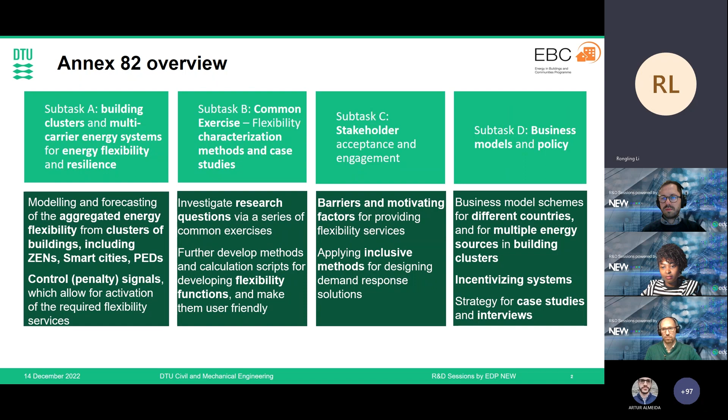Annex 82 started the working phase in 2021, and now we are in the middle of the 3-year working phase, and we are right on track. We have finished the first common exercise. Now we have defined the second one, and teams are starting to work on it. Through this common exercise, we define methodology. We also started to look into case studies and design surveys and interviews, and I will give you some details on this. It's a rather big team. We have participants from 22 countries, with about 50 very active participants working on these 4 subtasks.

Some highlights. We recently published a 10 questions paper regarding energy flexibility in buildings. Andy from Lawrence Berkeley Lab and I were leading this task. This one also served as a white paper for us to look into those questions when we work on specific tasks. We have many ongoing activities planned for publication. For example, there's another review on energy flexibility in clusters of buildings led by Jerome and Rui, and this paper is in the revision phase. We have another one on energy resilience of the built environment. That work has also started; we are now doing a literature review.

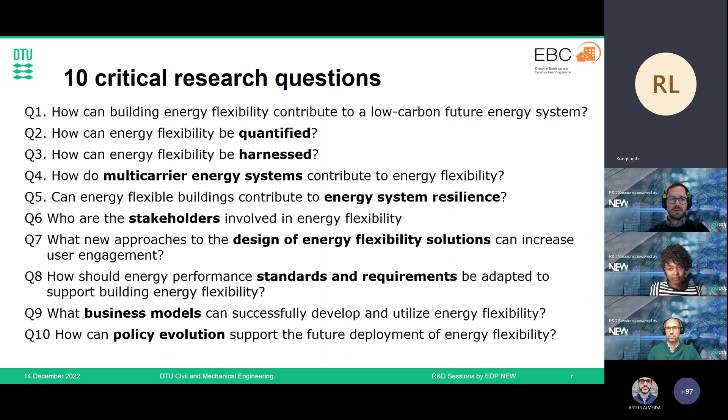At the moment there are no building standards that support the use of energy flexibility in buildings. We discussed that, and we suggest this should be changed. Then the last two are about business models and policy. In the end, we provide 8 recommendations on how to provide solutions to these research questions.

For example, the first one is using data-driven methods and focusing on aggregated level, considering the requirements from different stakeholders. In terms of control, we recommend using a supervisory control that can respond to grid signals at the building and grid level.

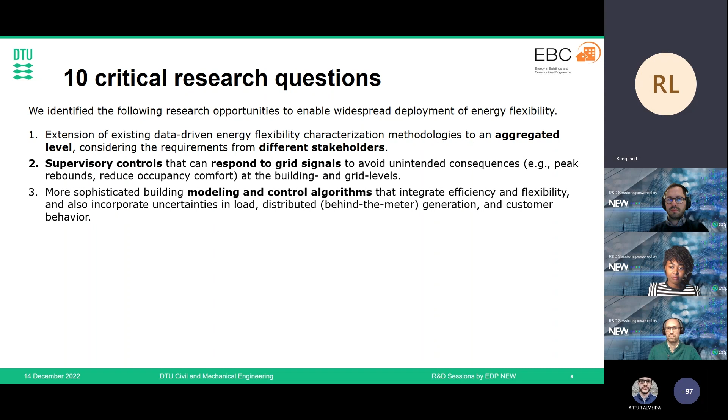And regarding algorithms, we discussed that more sophisticated building models and control algorithms are needed, that also take into consideration both energy efficiency and flexibility.

The fourth one is very clear that it is a research problem. We need to engage multidisciplinary approaches to address the technical, economic, and societal complexity of the challenge.

Then the fifth one is regarding resilience: design flexible building systems and controls that may contribute to more resilient systems when it is needed. We think that in order to increase the resilience of a system, the design phase is very important.

To include certain elements. And regarding policy and regulatory framework, we think that existing ones are not supportive enough, and we need to create new energy performance standards that do not penalize flexibility.

And the seventh, regarding business models, we think that scaling up is a very good solution for lowering the cost of deploying energy flexibility. Business models can be developed that support scaling up energy flexibility across multiple buildings and technologies.

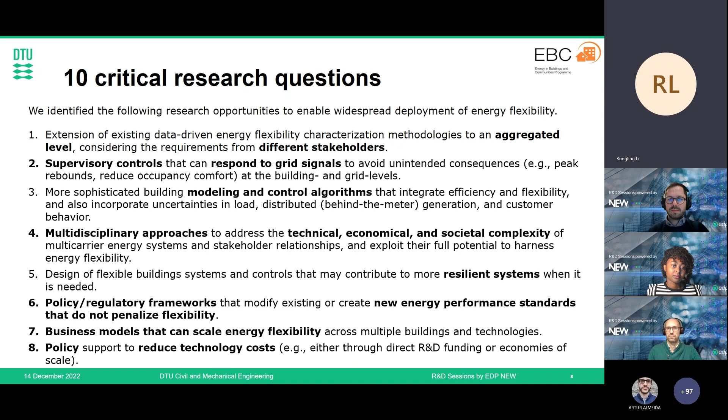Okay, and yes, as I said, we're in the middle of the 3-year working phase. However, due to the pandemic, we had only one in-person meeting in October, and that was a very good one. We had a very good discussion, and after that we had very good progress. This is a group photo you can see, and this is us. Thank you.

Thanks, Rongling, for this great overview about the energy flexibility topic and for clearly giving us the questions that should be addressed in the future in order to make use of energy flexibility.

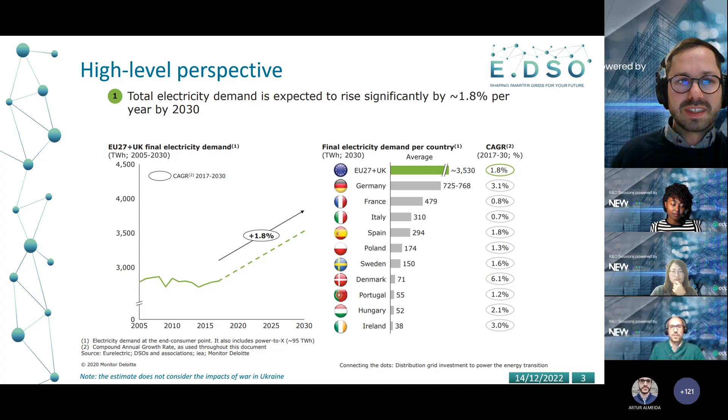This rising electricity demand has some drivers presented here. We can say there will be significant addition of heat pumps in the residential sector. Another driver is electrification of transport, so significant addition of electric vehicles, and of course renewable energy resources. 70% of the renewable capacity added is probably to be connected to distribution networks. And 40 gigawatts of the renewable energy capacity will actually be self-consumption, connected directly to homes and buildings. So these are the main drivers for the electrification trend.

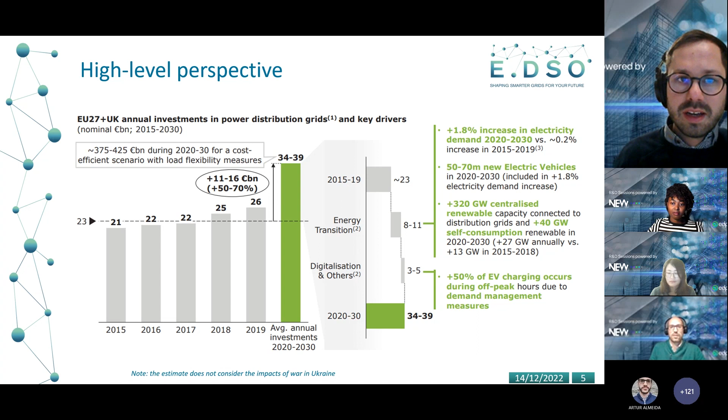If we break down the drivers of these increased investments, you can see that electrification of buildings, electromobility, and so on actually take up quite a significant chunk of the investment needed. But also, just to clarify, modernization of grid equipment, digitalization, smart meters, which are loosely connected to building smartification and electrification of appliances in buildings, also take up quite a lot of the investment needed.

So what is the actual potential of building smartification for DSOs in trying to address this significant increase of electrification and decentralization of the energy system? The potential is mainly related to networks at the low and medium voltage level. In the shorter term, we see the potential mainly in increasing grid observability for the network operator, which can help manage low and medium voltage networks, where grid observability today is not as developed as on higher voltage levels.

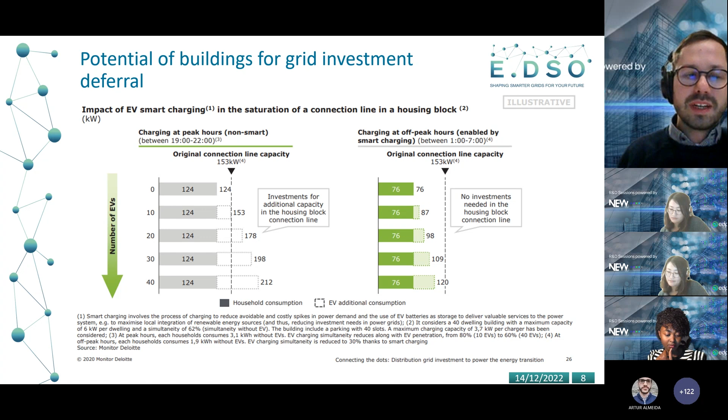To enable this, we obviously need to develop a new ecosystem for the medium and low voltage grids, especially with connecting all the elements we just described - the network operator, all the devices in smart buildings, and also developing the digital infrastructure necessary to achieve this.

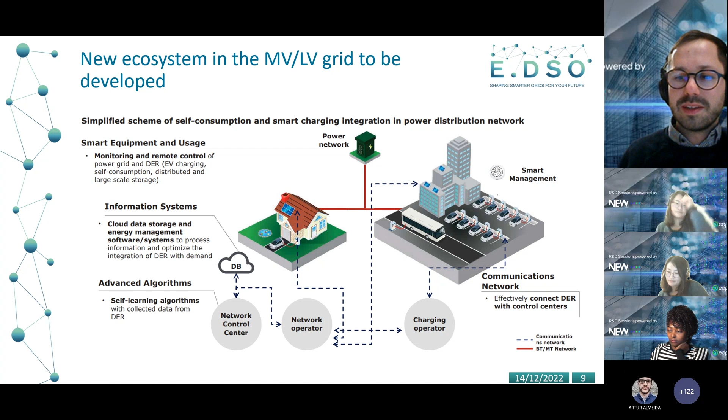Some of the specific challenges that DSOs are facing right now when trying to develop this ecosystem are described in this slide. First, finding business models and engagement of active prosumers. This relates to the point that these smart building applications are quite new, and consumers aren't familiar with the options available. The prospect of participation in flexibility markets might not be attractive for consumers as they don't know what it means. It's not clear to consumers, in our experience, that this can mean driving down the costs of energy. So this is something that needs to be worked on - consumer engagement.

It's also about investment certainty, as all these smart appliances in homes and buildings involve quite big upfront costs to invest in. But with flexibility markets being a market environment, revenues aren't so guaranteed. So we need to strike a balance between investment certainty for participants and having liquid markets that could also bring the required benefits for DSOs for local congestion management, for example.

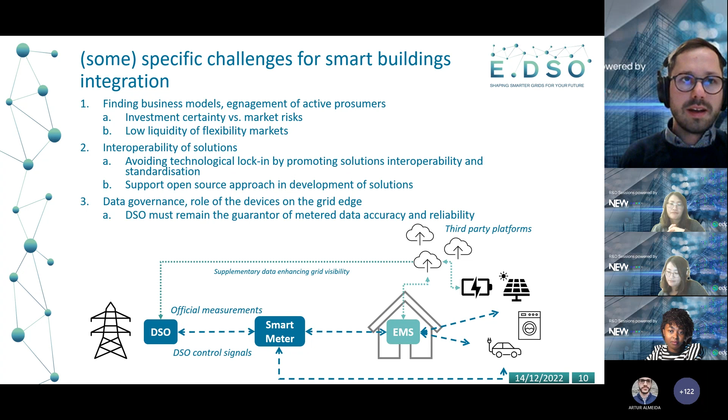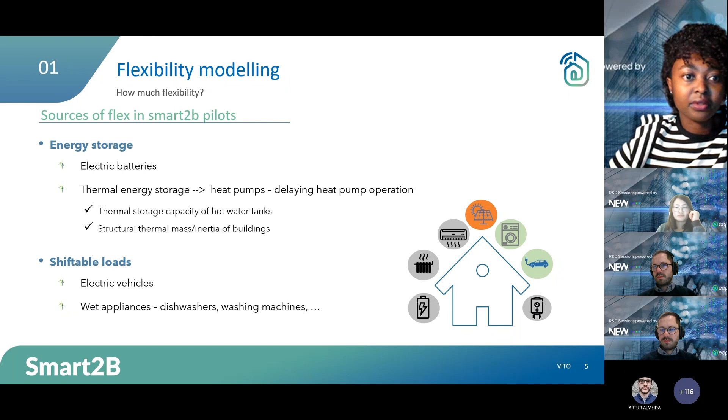But then the question that comes to mind now is how much flexibility can we get from all these devices that are found in buildings? So we need to somehow find a way to quantify this flexibility such that it can be used for something. And to quantify this flexibility, we are using this concept of flex graphs. So a flexible device has several options in time that it can consume or produce energy. So this leads us to having an energy consumption or an energy production plane.

So what a flex graph does is to visualize the area between the highest and the lowest path of this energy consumption plane, where the area of this graph then tells us how much energy can be shifted, and the number of possible paths within this area tells us the potential to shift the energy consumption or the production.

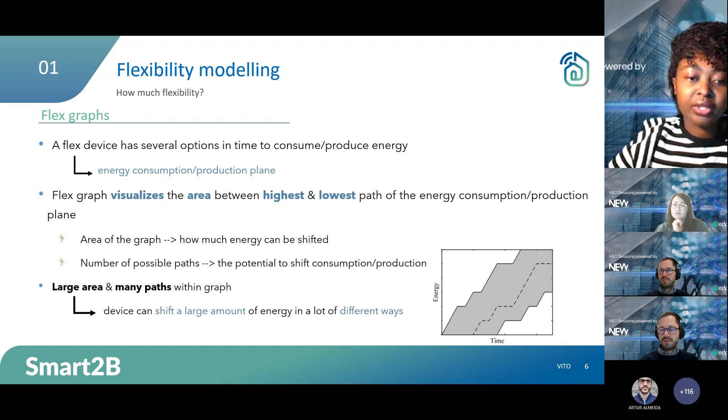So depending on how large the area is, on the number of paths that we can find within this energy consumption plane, then we can have an idea on the exact amount of energy that we can shift and the number of different ways that the device can consume this energy.

So looking at the flexibility that we can get from the devices that we are looking at in the Smart2B project, if we take, for example, an electric vehicle, there are two main things to take into account when we look at how much flexibility they can offer.

So we look at, okay, when the owner of the electric vehicle plugs the car onto the charging pole, if we charge the car as soon as possible, or if we delay the charging as much as possible, but while making sure that by the end of the day, when the user has to leave, the energy that was requested on arrival is met.

So then we can have an energy consumption plane, as the one shown here on the slide, which we can then use to quantify how much flexibility we can get from this electric vehicle.

If we look at a hot water tank, then to generate the flex graph here, we look at the different ways of either keeping the water in the buffer at the minimum temperature, such that if the water leaves the tank, the users do not perceive the water as too cold, or keeping the water in the buffer at the maximum temperature, such that the users don't perceive it as too hot.

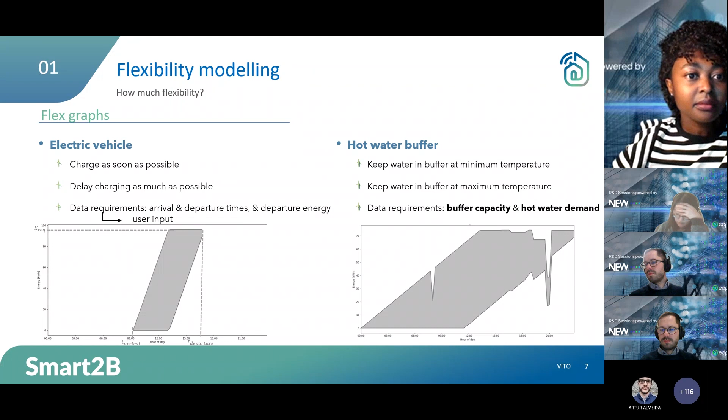Then we also have flexibility that can come from the thermal inertia of the building itself. And typically the flexibility from these buildings is represented by the temperature boundaries specified by the users of this building. But the challenge here is that if we want to use this flexibility from the thermal inertia of the building with the flexibility from the other devices, then we need to map this from the temperature plane into an energy consumption plane.

And to do this, we need to model and characterize the building behavior such that we can then determine the additional amount of heat that the building can store, and therefore the corresponding reductions in energy for heating or cooling these buildings.

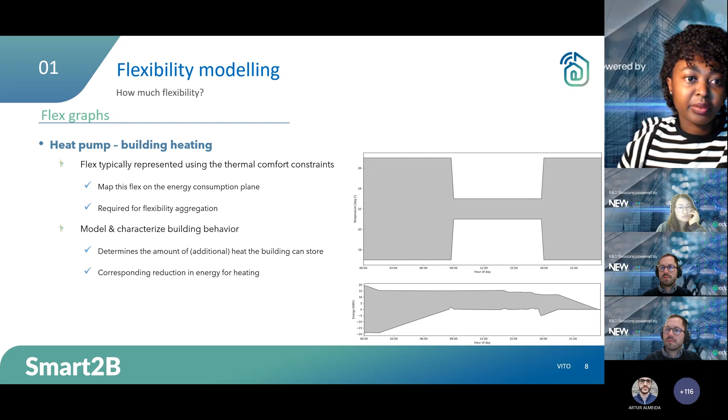So in the Smart2B project, to model these buildings, which we need to generate the flex graphs for the building, we use gray box models of buildings. A gray box model is a very simplified way of representing the building, where we lump and represent the different building components as thermal resistances and capacitances.

So here we exploit the physical knowledge of the building to define a model structure and some state equations of the building. And together with some weather and building measurement data, we can determine the parameters that are much more representative of the building that we are considering.

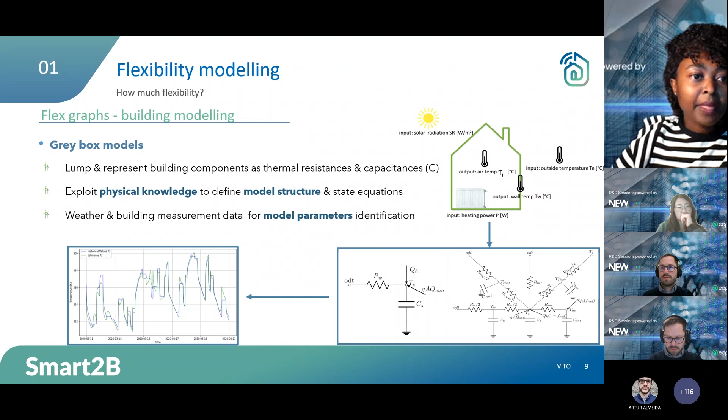So this notion of flex graphs is a very simplified and generic way to quantify and represent flexibility from different devices and installations. And it's also very good because it's very easy to aggregate flexibility from different devices, different buildings into a single resource, which could be used either for energy cost savings or for local congestion management, as Andrej mentioned in his presentation.

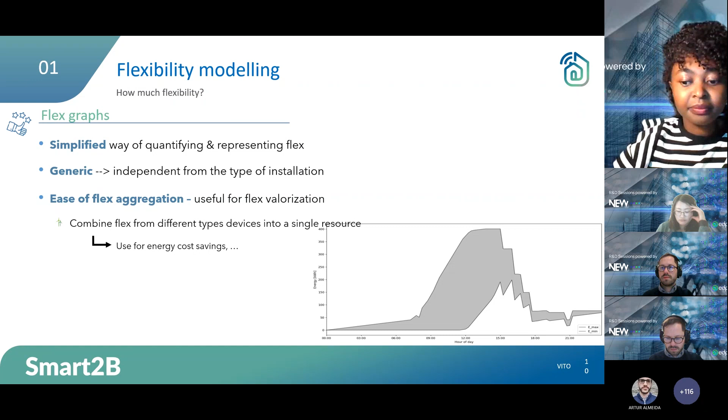So to valorize this flexibility, because of course it's of no use if we can quantify this flexibility but cannot use it anywhere, it's typically done through demand response applications. And there are two types of demand response: the explicit and the implicit demand response.

In the explicit one, the devices that are providing flexibility can be directly remotely controlled, typically by an aggregator or a system operator. And this is typically done with large manufacturing industries.

Then we have the implicit demand response, where there is indirect load control through a time-varying energy price signal. And this is very common at the building and residential level through the use of energy management systems and controllers, which is what we also consider in the Smart2B project.

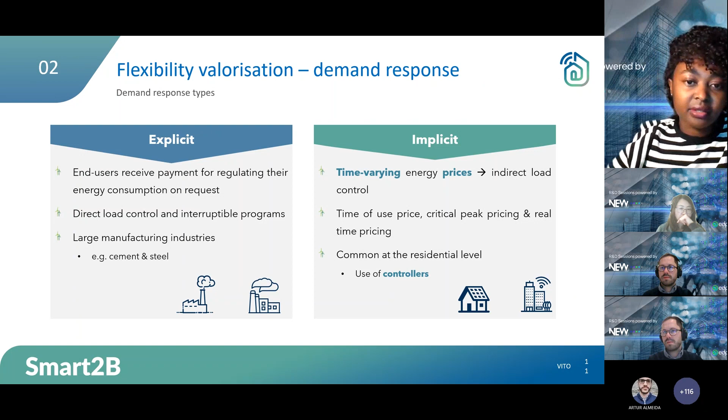So to have an economic value of the flexibility that we model and quantify in Smart2B, we actually use this by scheduling the operation of the different devices that are providing this flexibility. So we do this via optimization, where we consider not only optimizing for least energy cost, but also looking at the least energy consumption. So we have a kind of approach where we first have an optimization for least energy consumption, specifically for the HVAC systems in the building.

And this provides us with a baseline schedule, which is then used in the flexibility modeling to get the flex graphs and quantify the flexibility of the buildings. And this aggregate flex graph and the baselines are then used in the least cost optimization to obtain an optimal power schedule that is then disaggregated to the different devices in the building as the control signal here.

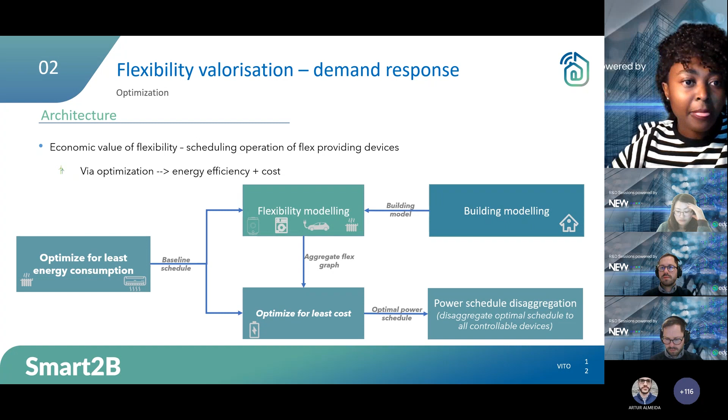So in addition to using this baseline and the flex graphs for the optimization for least cost, we also use some forecast on the energy prices and the energy generation, which helps us to, as mentioned before, the goal is that if we have some local generation on site at these buildings, then we also want to maximize the use of the local energy generation. So when we do this optimization with the optimal power schedule that we get, we can then actually quantify the value of the flexibility that we get from the different devices through some form of energy cost.

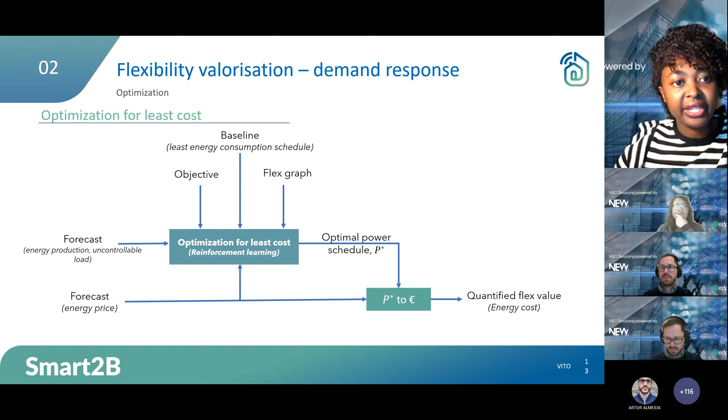So to conclude this presentation, our goal in this service is to develop a very generic and simple tool for flexibility aggregation, such that we can actually aggregate the flexibility from different devices, different buildings, such that the building owners themselves can use it for energy cost savings, or that the system operator can also use it for congestion management.

As shown in the previous slide, in our optimization we have some forecast, which means we can never have a perfect forecast, so we have some uncertainties. We also have to take into account the user behavior. For example, when you generate the flex graph for the hot water tank, you need to take into account the hot water demand of the building, and for this we also use a forecast. And this user behavior is very stochastic. So it means that when we valorize our flexibility through optimization, there are a lot of uncertainties that we need to take into account. This is a challenge, but this is also an opportunity that we have used.

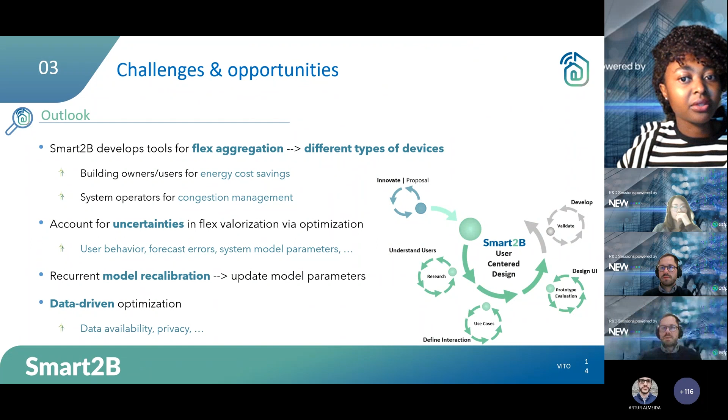And right now, the idea is to have a recurrent model recalibration to update the model parameters such that we can account for the model mismatch in the model parameters. Another way in the optimization that we try to deal with this is that we use this data-driven optimization method, reinforcement learning, for obtaining the optimal power schedule. But of course, because these data-driven methods are always quite data hungry, we still run into the challenge of the availability of data, because we are relying on data from the pilots, which takes quite a while for us to get good amounts of data that we can use for the optimization.

So thank you very much, and your questions are welcome.

Thanks, Brida, for your presentation and also for giving us an overview about the flexibility services of Smart2B. Now we have time for some questions. I know that we already have some in place, so just pick it. So first of all, from João Cravinho, I think, just because I just missed the question. So from João Cravinho on the chat, I think it's for

Hongling. In your opinion, what is lacking or missing for the realization of local or wider flexibility markets? Thank you for the question. I think the second speaker in his presentation gave a lot of hints on the answer to this question. I would like to add something on it. So certainly the uncertainty of energy flexibility is something that holds back investors from putting money into this business.